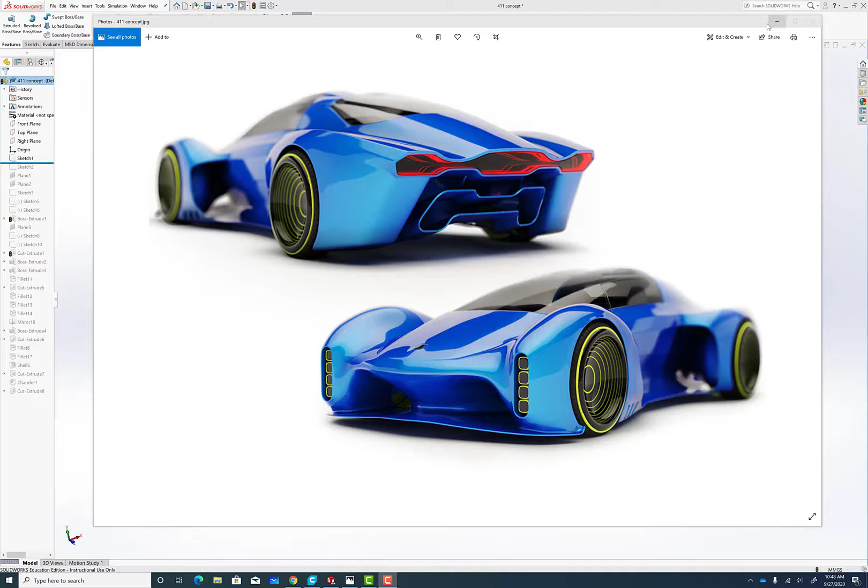Hi folks, I wanted to make a short video on how I went and made my own CO2 car, inspired by this Porsche 411 futuristic concept that I saw on the web. I went ahead and found some additional pictures, but I wanted to show you what that looks like and what I started off with.

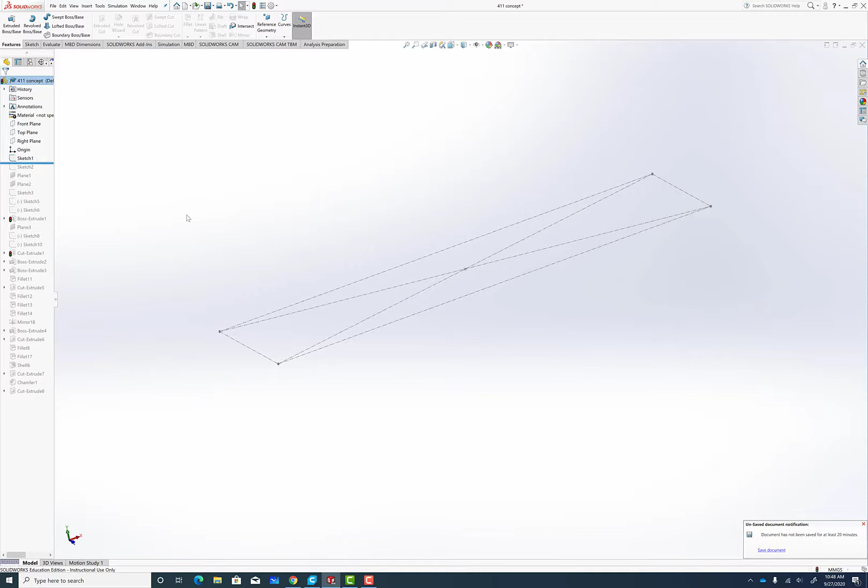Keeping in mind all of the restrictions and limitations we have for our car, particularly the length being 200 to 210 millimeters, and the height, etc., I started off with just a rectangle, a center rectangle, to keep my reference in the middle.

And then I went ahead and added a sketch picture. If you guys remember, you can go ahead and add a sketch picture. This is one of the ones that I found online, the side view of that particular car.

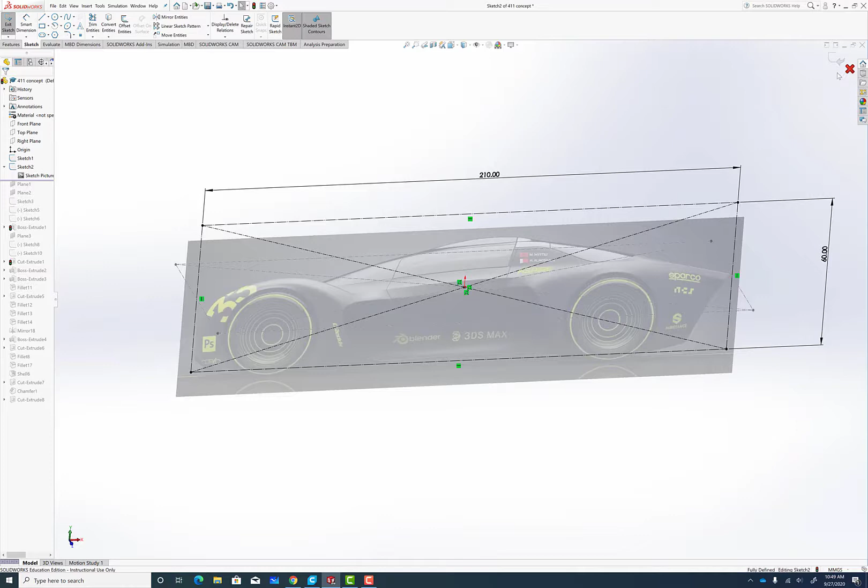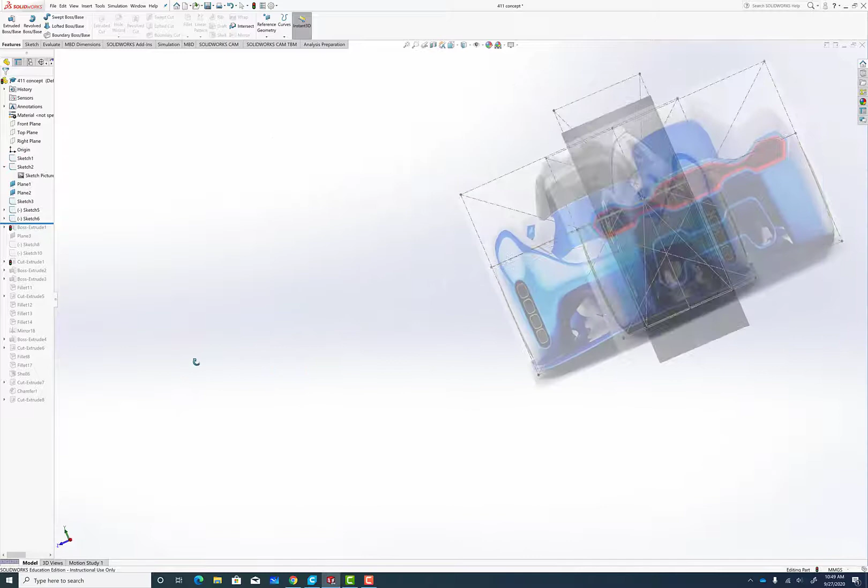So I got that one and put it in, and then I added a couple more planes, one on the front and one on the back. On those planes, I put the front picture of the car and the back picture, just to help me visualize it. So I aligned them all, and I'm going to use that as a reference for making the car.

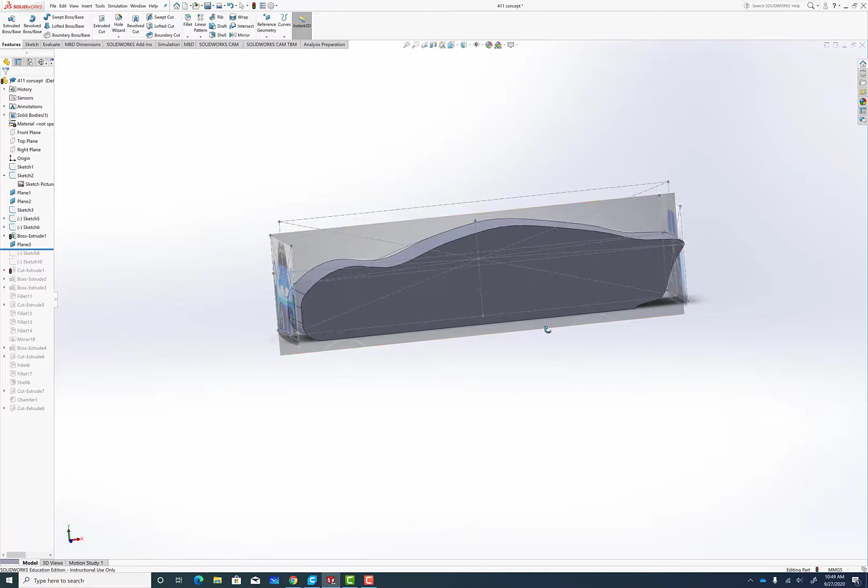So I took the original outline, traced it using the spline tool, fixed it a little bit, rounded it off and whatnot, and extruded it. I extruded it a little bit more than I needed to, and you'll see why in just a second.

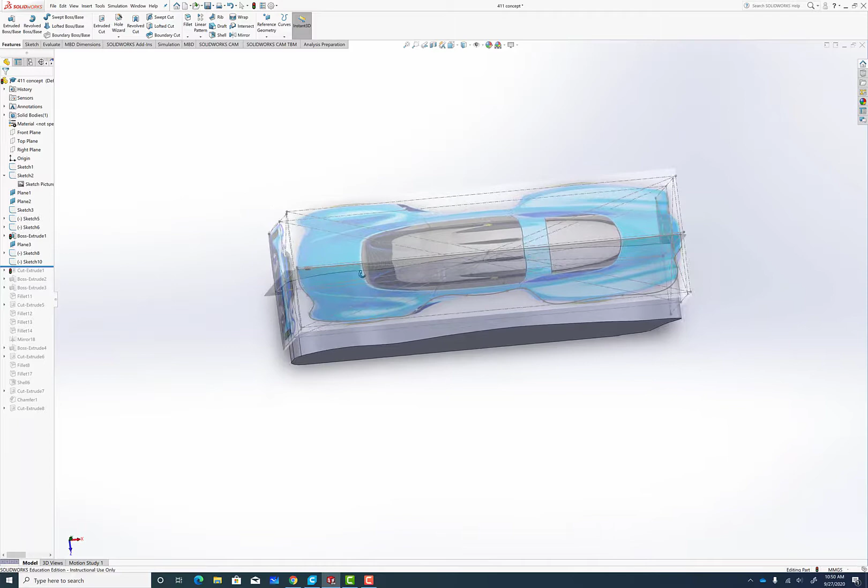I then went ahead and put a picture of the top of the car on top of it. Truthfully, I want to let you know I elongated the car because the dimensions we are looking to build with are a little bit different than the ones I saw in that picture, but as it is, it's just a reference. So that was my original reference.

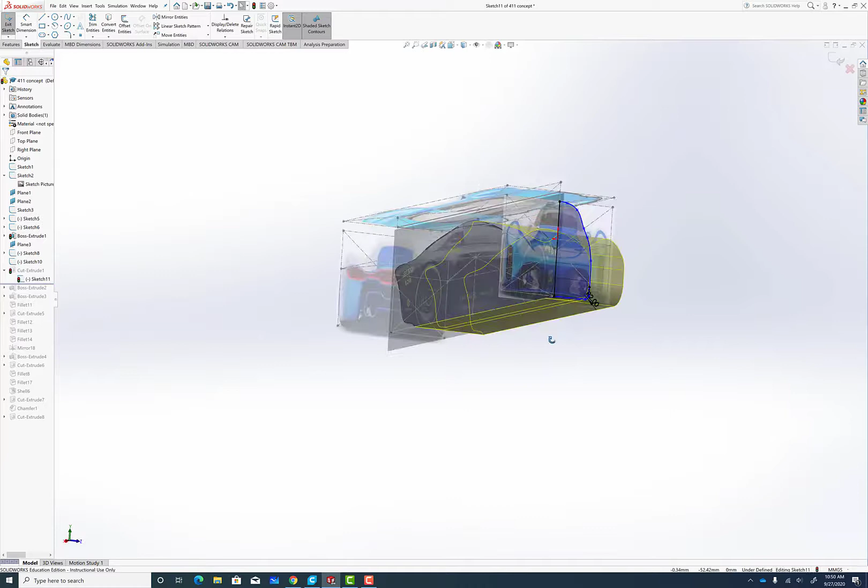Okay, then what I did is bring out the sketch. I took that original reference for the front of the car, outlined it, and then cut it. I cut that original extrusion, cutting from front to back. That particular feature gave me a rounded side profile.

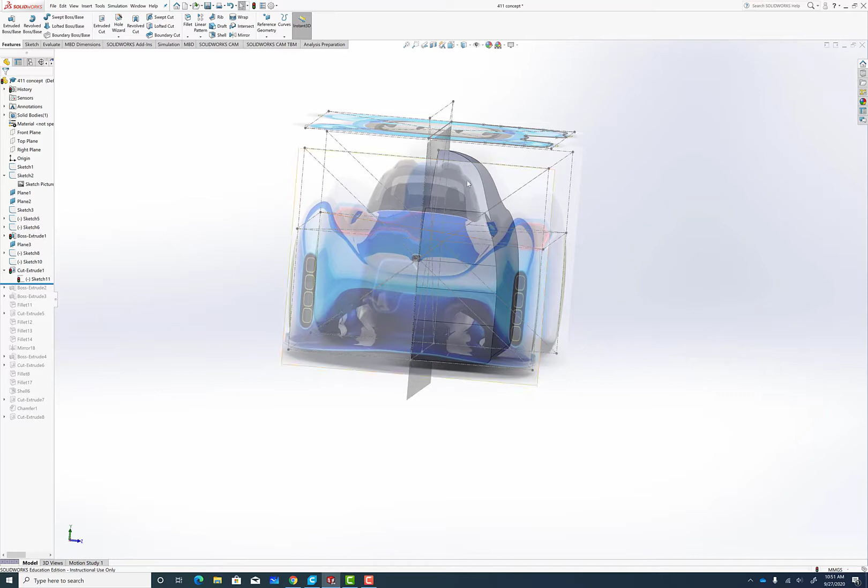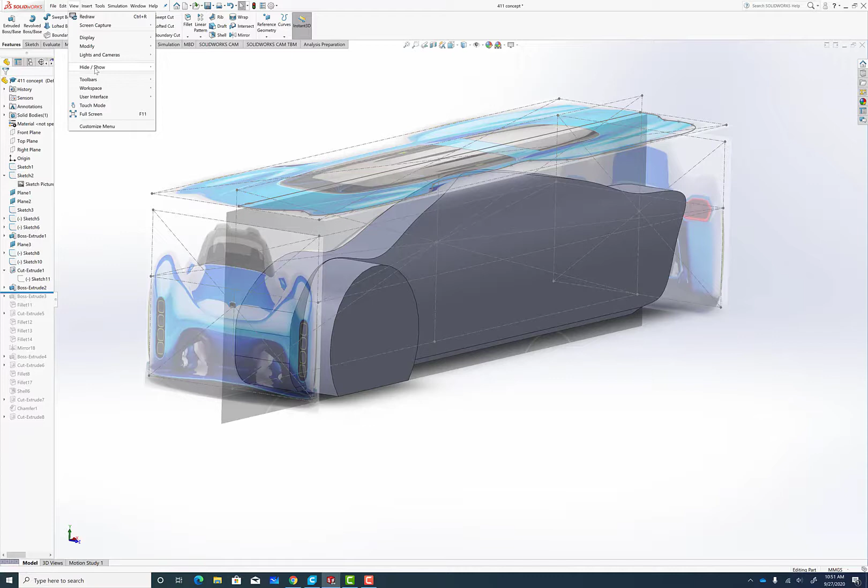Originally I came in from the side view, and then I took the front of the car and cut it all the way back to give me a rounded surface. Now from here, let me get rid of the pictures for now, so I can go to View, Hide, Show, and get rid of the sketches.

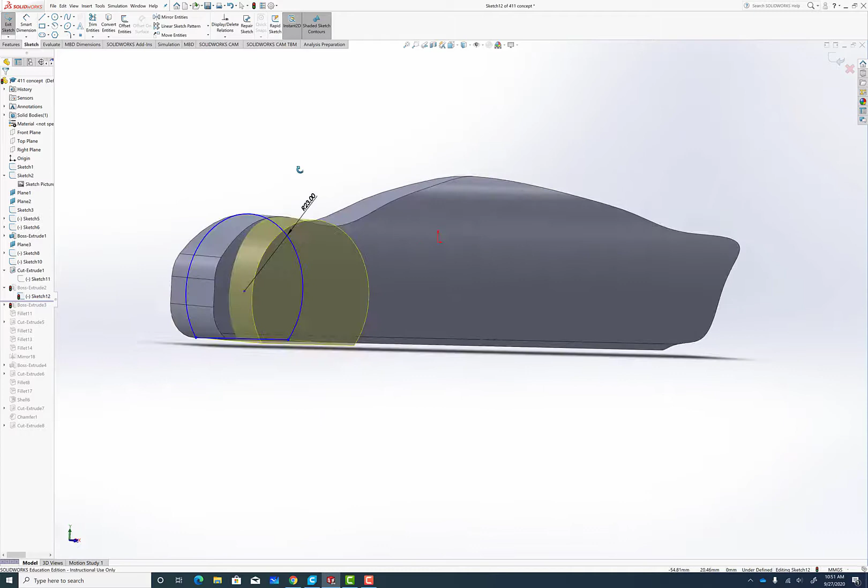On this next step, I decided to make those big wheel wells, one in the front and one in the back. For that sketch, I lined it up so I'm looking at it perfectly straight on, and lined up that circle. The radius was based on the size of the tires we're going to use, and I figured 23 was going to be big enough to house the inside of that wheel.

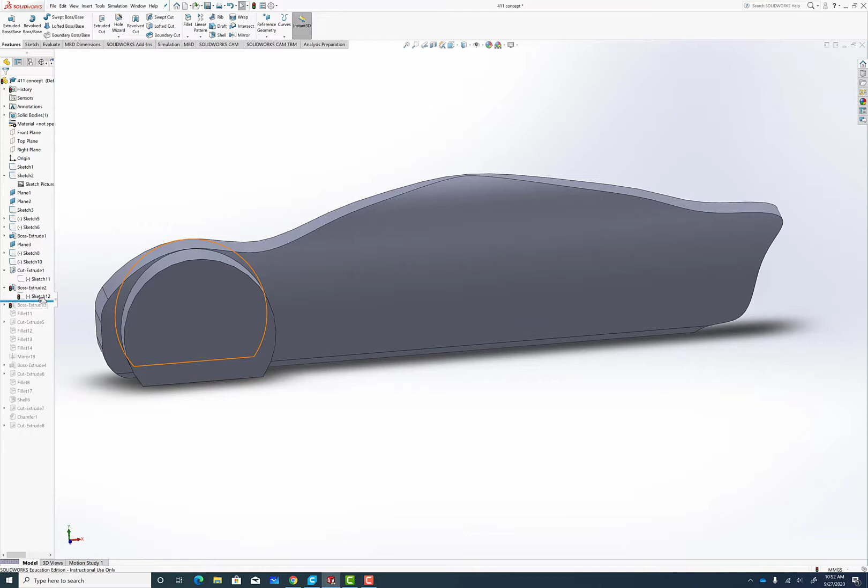It turned out I had made it originally smaller, then I went back and changed it, so I made both of those stick out. Then I started the filleting process, and I went ahead and filleted the edges for this.

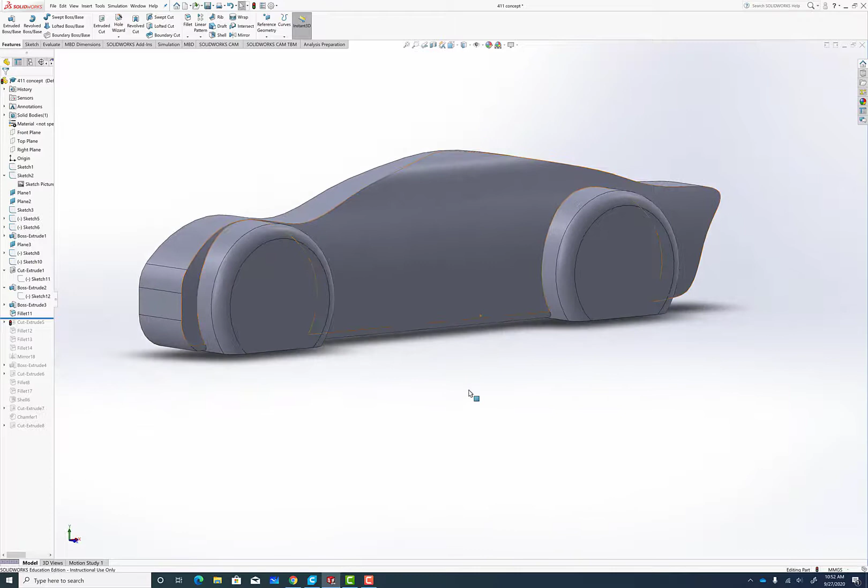One really important thing that happened: notice that everything on the bottom is kind of rounded off now. But I mentioned before that the bottom of the car has to be perfectly flat in order for me to print it. So I cut it by using a rectangle on the bottom, cutting the whole bottom off by a little bit and flattening it out.

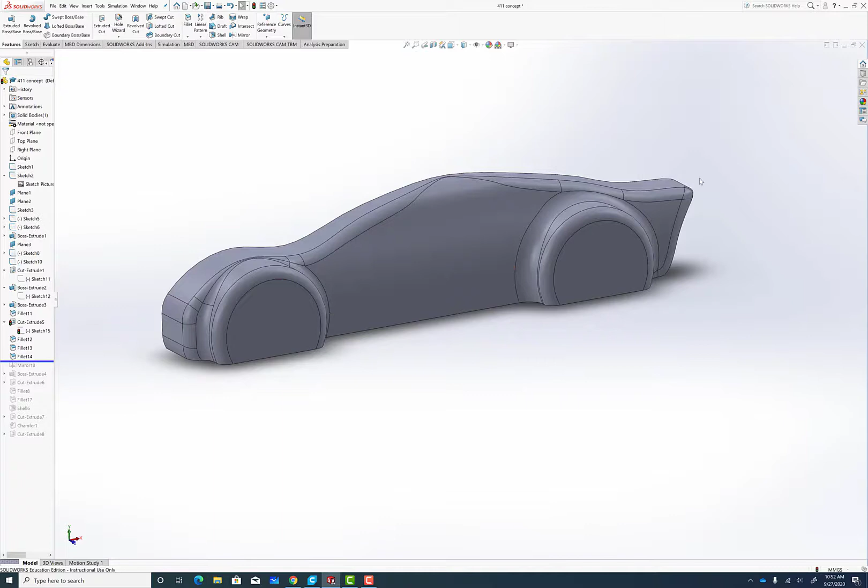Then I continued to fillet it in—in this case the back of the wheel well, then the front one, and finally the profile. Now from here, notice I've only been doing half of it. I'm going to go ahead and mirror it.

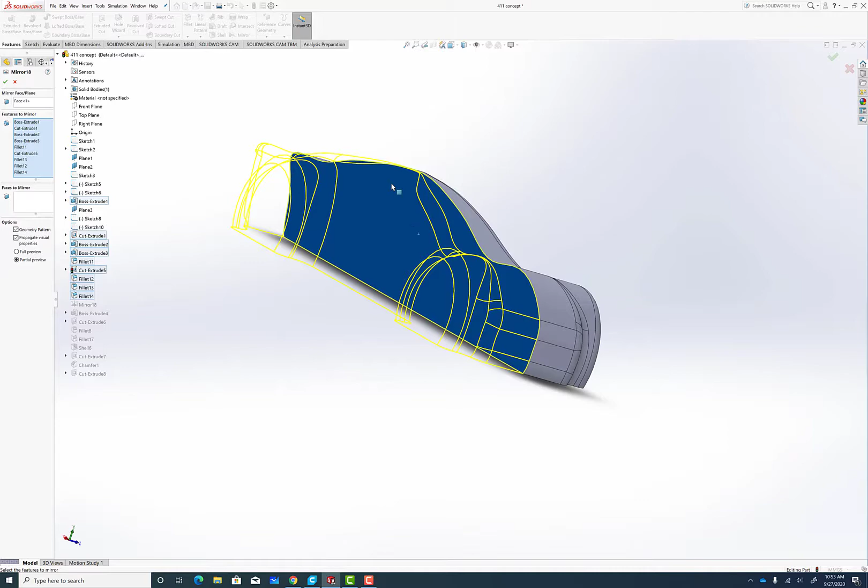What I did to mirror, just so you know: if I go to edit feature, you are going to use this face or a plane, where that face is, in order to mirror it. Remember, for a sketch, you need a line in order to mirror it, but for a solid, you're going to need a plane.

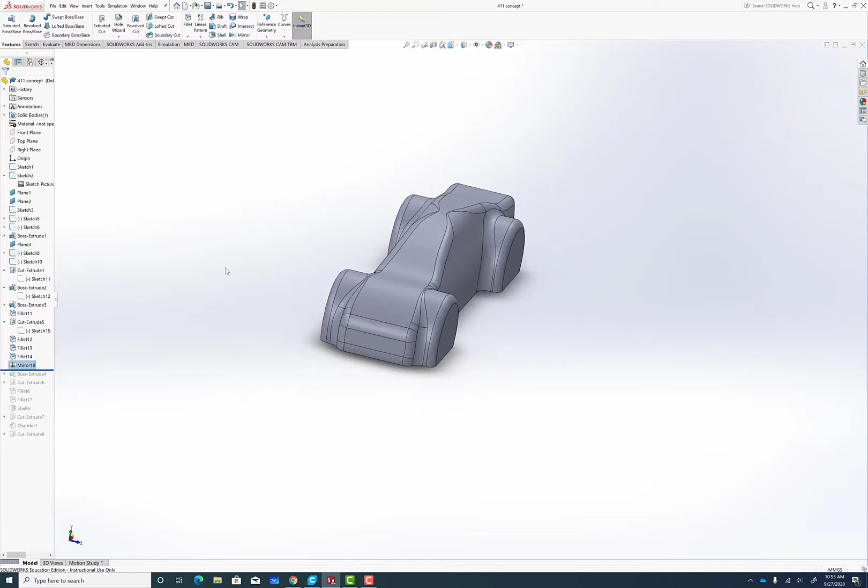Then I selected all of the things that I wanted to copy over. More than likely, you're going to need to click on geometry pattern, which allows you to keep both halves. So that's how I went ahead and did that, and it looks really good.

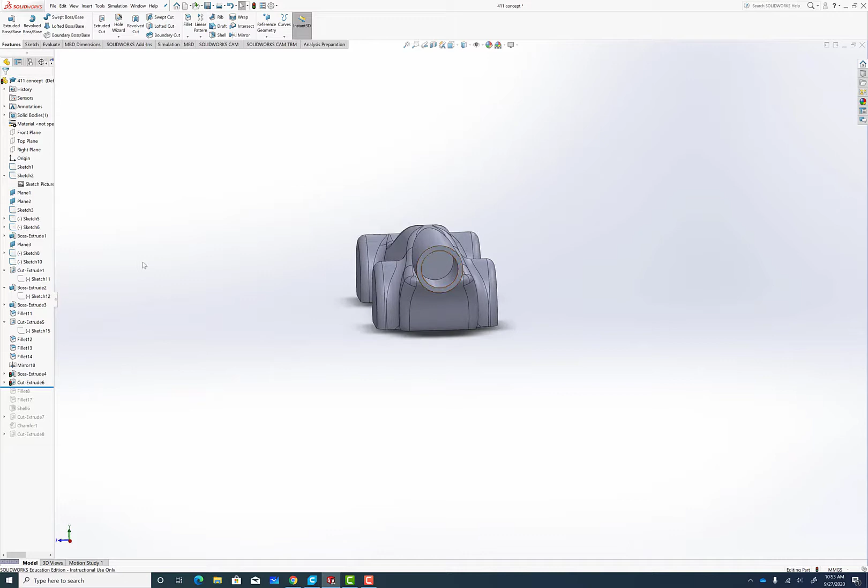The other thing that's still missing, of course, is the tank, or the spot for the tank to go into for the cartridge. So once again, using the measurements that I gave you guys, I went ahead and made the extrusion with the hole, and just so that I can double check, I wanted to know what the size of this inside hole is.

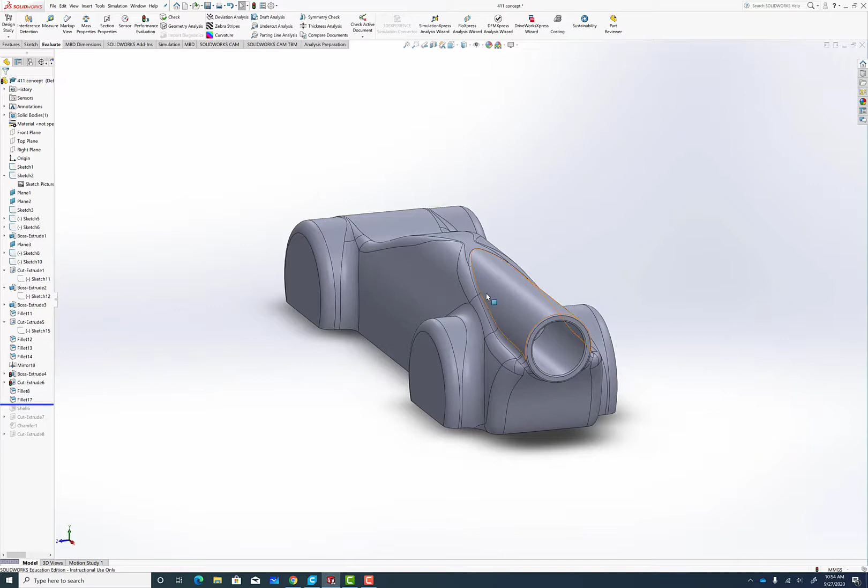I knew that it should be 19 millimeters because that's what I told you guys, so I just double-checked it—it doesn't hurt. Then I went and filleted the edge, the little inside and the outside edge of that, and also where it joins the body.

I spent quite a bit of time trying to get these fillets the right size. Sometimes if I went too big on one fillet, the other fillet would crash, so you're going to have to spend a little bit of time on this. It probably took me a couple of hours to get all those fillets just right.

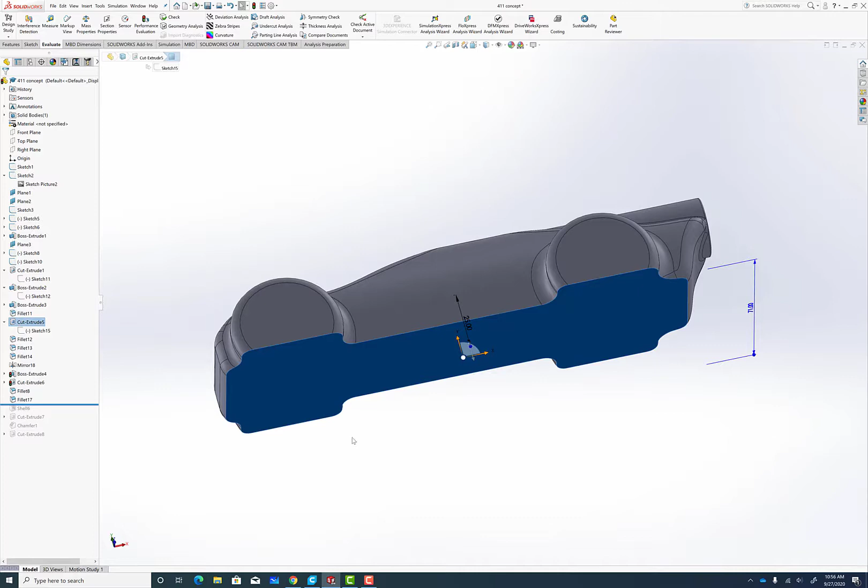Once you have all your fillets done, go ahead and select the bottom and do your shell. The shell, remember, has to be 1.5 millimeters in thickness. You don't have to click show preview, but there's a good chance it will fail initially—that's something else that's going to take quite a bit of time to get just right.

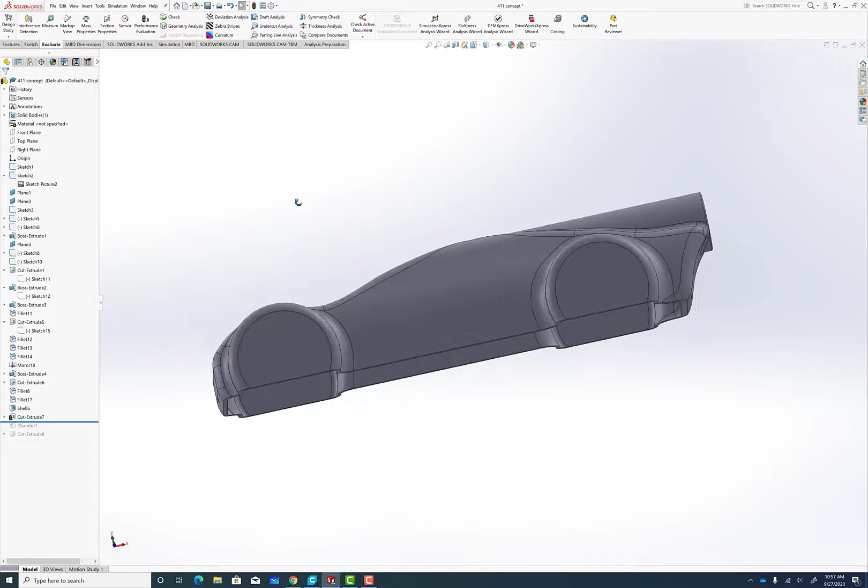The last cut extrude that I did here was for the little hole for the fishing line. Originally I had mentioned that one option is to have a post or support for an eye hook where the fishing line goes through, but we're going to try putting a hole through the whole body instead, in order to eliminate that particular step.

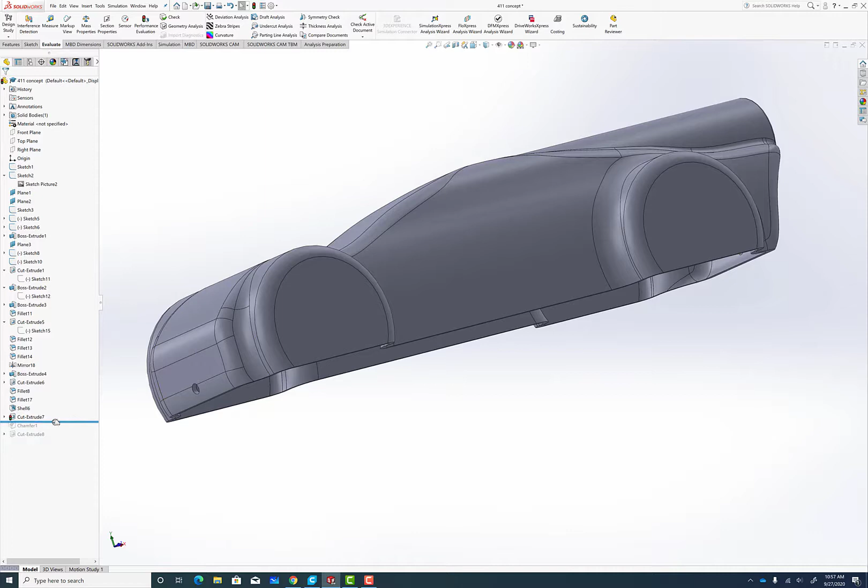And then I just chamfered the front of that hole, and then the holes for the axles. So from here, if you haven't already done so, go back and forth with the assembly of your vehicle—putting the wheels in, the axles in, the cartridge, etc.—and you'll realize you'll probably have to go back and make some additional changes.

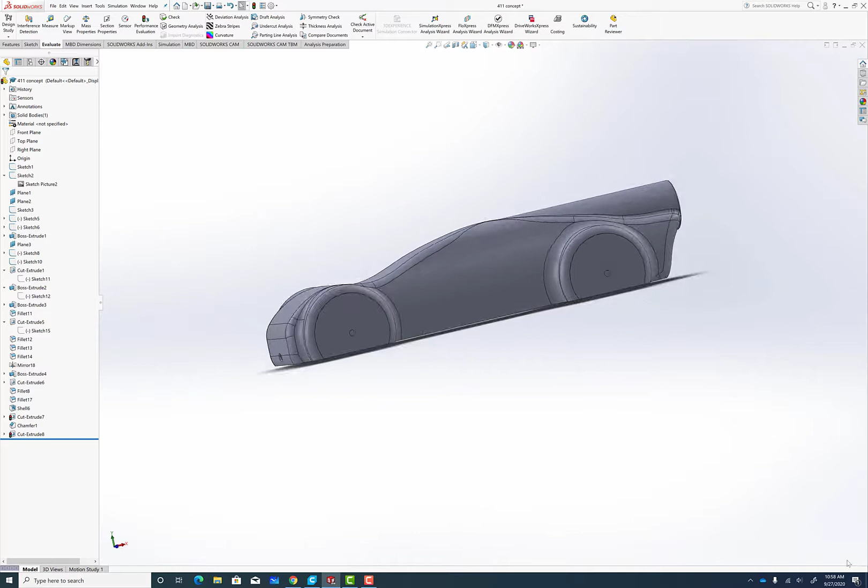But anyway, I hope this helps. Good luck with your build.